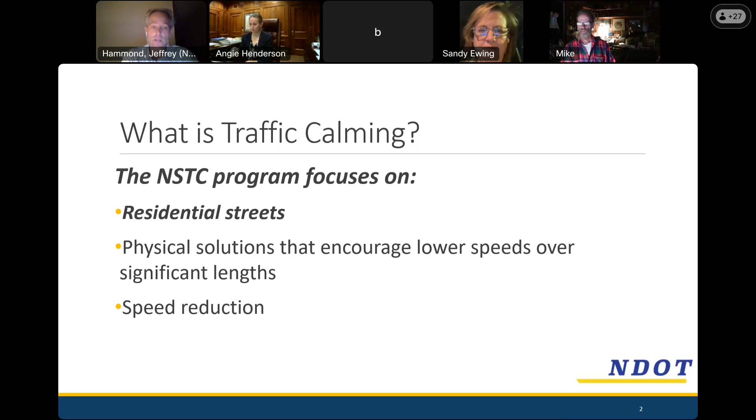We do focus on residential streets. That's as opposed to some of the larger streets that are meant to carry more traffic and sometimes at a slightly higher speed. We really focus on lowering speeds, and that sounds obvious, but sometimes people think we are trying to move traffic, shift it away from one street to somewhere else, and that's really not what our design is intended to do. We look very carefully at the types of countermeasures that we deploy on a street, just to make sure that we're focusing on speed reduction and nothing else related to car travel on the street.

This is one part of a bigger effort in Nashville and really across the nation, dealing with some of the safety issues that our country has seen involving speed. Engineering is part of it. That is what the Department of Transportation has in its purview. It can affect a change in the right of way. It cannot enforce traffic. That's the job of Metro PD.

And a lot of us wish we would have more police out in the cruiser writing tickets, and that might bring about slower speeds, and it might. We typically think of those impacts being relatively short-lived, but it's certainly a component of a well-functioning safety system, and we work hand in hand with MNPD on this program and others to try and bring about better outcomes.

Education is a big part of this as well. Some of the things that we can introduce in the right-of-way as part of a traffic calming program do get to reinforcing a message, an education message in terms of what the speed is or how fast you are going. But by and large, we really focus on that engineering component, putting things in the road that will physically limit speeds. And we like to show this slide.

It's one of the main reasons why we feel like this is a really important program. And I think a lot of residents in Davidson County agree with this sentiment, that you'll see that in the numbers here about how in demand the program is. But we know when we've got a street where we've got cars and bicyclists and pedestrians and everybody trying to share the same limited space, that if we can slow the cars down, and there is an unfortunate instance where there's a pedestrian car collision, there's nothing like speed to boost the survivability of that outcome.

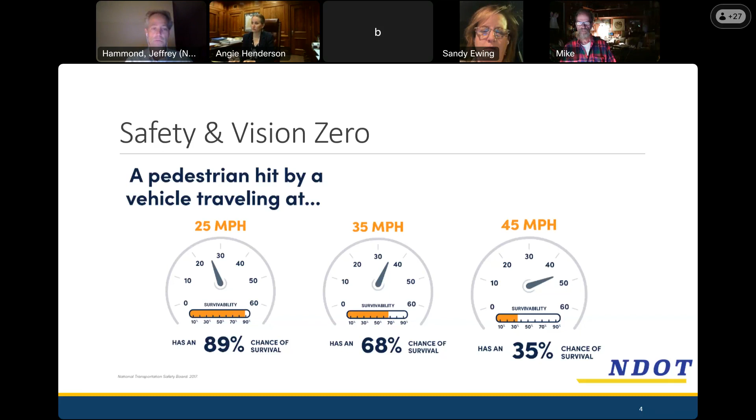In other words, if we can bring traffic down to that 25 mile an hour or less threshold, you've got a much higher probability of not walking away from the crash, just surviving it. And so we really focus on that. And Page is one of these streets where you've got a lot of pedestrians who want to walk on the street. We're aware of that. Some probably make the decision not to because they don't feel safe doing that. And so all of these things kind of come into our thoughts when we're designing a traffic calming project.

I mentioned the in-demand nature of the program, it has remained exceedingly popular ever since we really started putting in speed cushions back about 5 years ago or so. As of this last traffic calming application window, we have 2 of those a year, and we're still well above 400 streets, just like Page Road, where people have requested that we come in and do a project because a lot of Nashvilleans are seeing these same issues involving high speeds and sometimes worse behavior.

Just different things happening out there on our residential streets, which are not desirable. We do pick about 50 projects a year right now, although this last fall there was an announcement that Nashville is doing its largest traffic calming cohort ever. We selected 85 new streets at one fell swoop, thanks to council and their interest and support of this program and finding the funds to do that, and we're working diligently on that. I'm glad this project is ahead of those, a little bit ahead of that tidal wave of new projects coming in, so hopefully that'll make this one move along pretty smoothly.

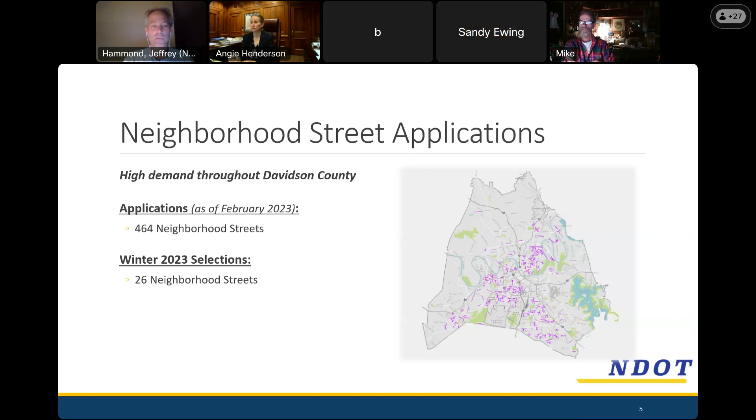About 70% of the score has to do with actual driving and traffic characteristics, speed and volume. What drives that score - speed is the biggest single consideration that we have. But the other 30% are very important too, and those often differentiate which projects get to move ahead and which have to wait, and that has to do with the presence of things like sidewalks or transit routes.

You guys don't have sidewalks, and so that actually bumps your score up, we do take that into consideration. The presence of places that might be a walking destination - of course, you got a big one there with the park, and so that factors into the score as well. Parks and schools and those types of things. And then we do look at the instance of any kind of a pedestrian injury or fatality crash that might have happened on the road as well.

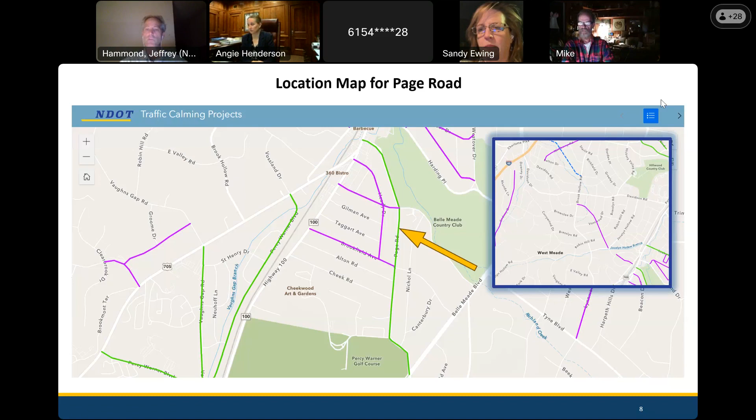So a little bit about the tools available in our program. We'll start with speed cushions. This is really the bread and butter of this program, and a lot of people just associate traffic calming with speed cushions—that's okay, it's probably 95% of what we do, so it's very understandable. When I show you the proposed plan for Page, like almost all our projects, speed cushions will be a central component of it.

If we leave 4 or 5 feet or more, we know what's going to happen. People are going to drive around them, and we've had experience where people will actually leave the road to drive around them if we let them, if we give them room to do that. I think that's a pretty tall order on Page. I think you've got some pretty unique side conditions where people are not going to do that because of the edge condition with ditches and trees and so forth. But we know that's one aspect.

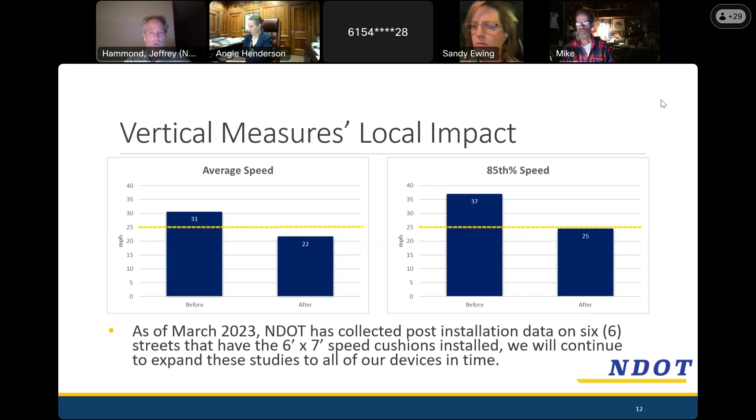Another tool that we've got in our toolbox, probably the second most frequently used, is radar feedback signs. You may have seen some of these around. They're solar powered signs, and they just do what they say they do.

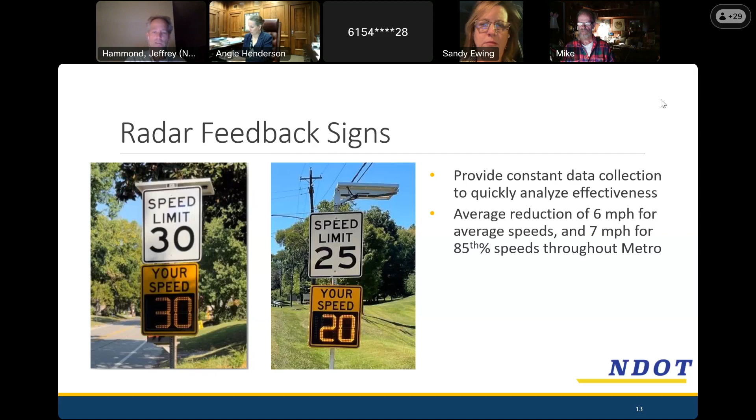They give you feedback about how fast you're going. A lot of times we'll use these in places where we really can't use a speed cushion, like a sharp curve or steep hill, or where there are so many driveways and intersections we can't fit a speed cushion without inconveniencing someone. It can be a good tool, and it is effective, especially in the short term. We're still in data collection mode to see how that effectiveness holds the longer the sign is out there.

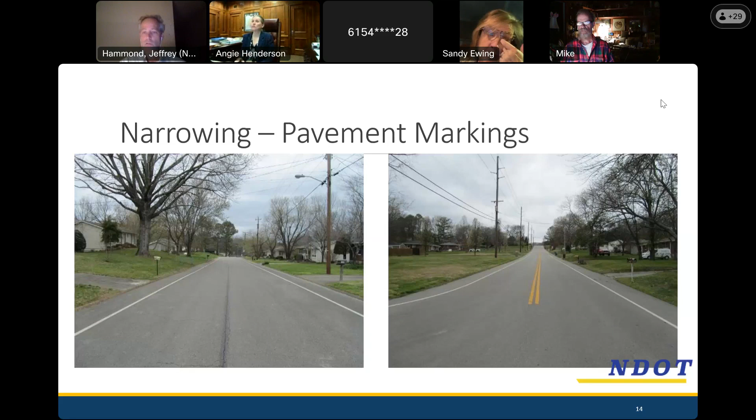So just another tool that we have, and again, this gets back to the educational component of traffic safety. Occasionally, we'll use narrowing if a street does not have any pavement markings. Sometimes adding a stripe can visually narrow the street and give the perception that it's narrower than it actually is. We have to be careful doing that. In this picture, we added a center line, but under different conditions that may communicate it's more of a major street and that it's okay to go faster. So we really look at those case by case to make a recommendation about whether that's a good treatment for slowing traffic down.

One tool we keep in the toolbox, but we've had a lot of thoughts concerning larger vehicles and how they navigate these, is whether the inconvenience they create is worth the trouble of putting them in. The jury's still out on some of those, but we have deployed them in some neighborhoods. Traffic circles - school buses particularly have a tough time navigating these, so it's something we keep in the tool, but use pretty sparingly.

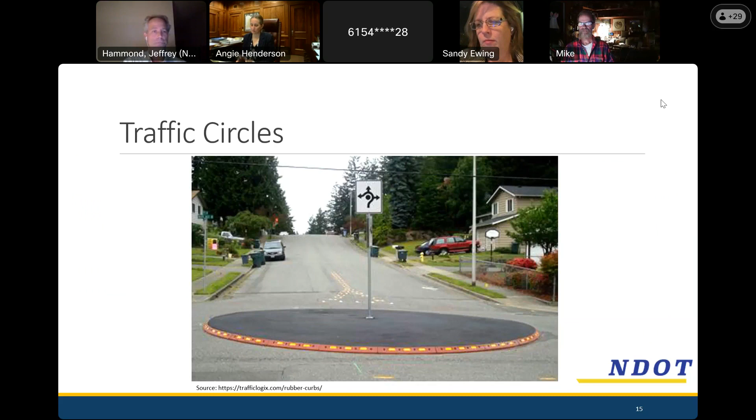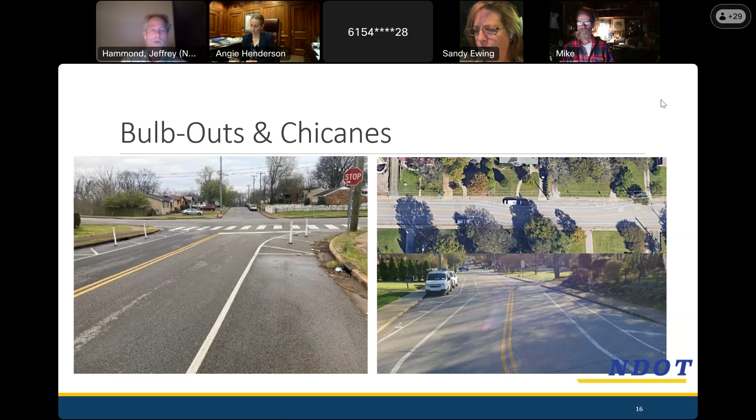Sometimes people will say what we really need, and I know this is the case on Page Road, is sidewalks - somewhere safe to walk that's outside of the road. There have been meetings discussing the issues, details, and cost of doing that on a street like this, and there are other avenues to request those types of treatments.

Hub Nashville is always the best go-to. If you're not familiar with it, it's hub.nashville.gov, or you can just pick up the phone and call 311. We like to promote that because really any service you want to request in Metro, that's your best first stop. It's logged, so you've got a record of having made that request, and they get it to the right people. We've also got a couple people here who do great work in walking and biking infrastructure, and beautification and vegetation.

So on to, I guess, the middle objective of the evening. We want to show you what we're thinking about Page Road and get some feedback.

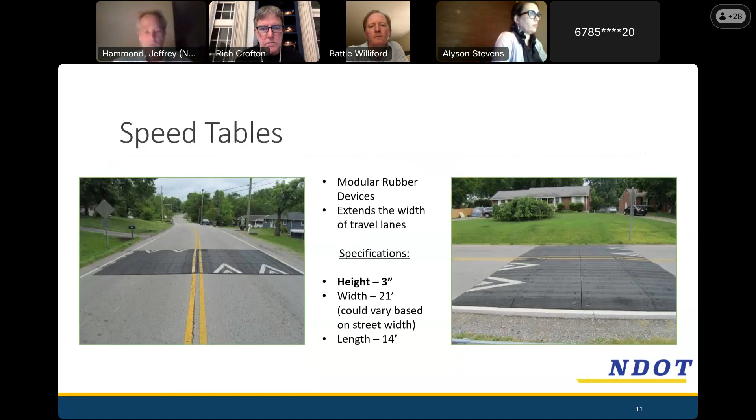That's really the point about the signs - it's not to bring any more speed traffic calming aspect to it. So for that reason, we really can't just pull them out and say we think they're kind of ostentatious, so we're going to not use them here. They are really part and parcel of the project. But I will say, the policy NDOT uses on these is anytime we have a run of speed cushions in between two streets - so for instance, in between Forest Park Drive and Cheek Road, we have 2 cushions proposed.

Let me use this as an example. Between West Tyne and Harding, we have 3 cushions proposed. We may not have to sign that middle one, because we can sign the first one that says speed cushions ahead, and the other one coming from the other direction, speed cushions ahead, and not necessarily have to sign all 3. But where we have an intersection in between and new traffic is entering this road that would not have seen those signs, our policy is we do sign at each of those locations.

There's one other benefit it can have. Let me go back to my picture. It's going to depend on what set of speed cushions we're looking at on the page. But as I mentioned, we know there's some severe drop-offs, big trees, and probably landscaping walls and other things that a car does not want to hit in order to drive around these things. That can also be kind of a hardening of the edge, so that if that sign weren't there, somebody might have the gall to drive around this thing, leave the road, and try to drive around it and come back.

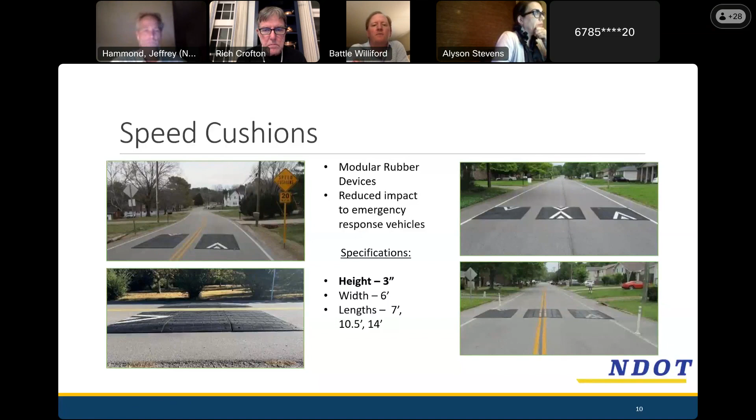Anything else there? Sure. I have one last question, sorry. Sure, have you found—I know you have some of those sticks, delineators, whatever you call them, in a couple of these photos.

I noticed you didn't use any examples where those were placed down the center of the road. I know there's a couple places in town where those are placed down the double line or down the center of the road, also as a traffic calming mechanism. I know Page is obviously very narrow, so that might not be an option here, but I was curious if you found the speed cushions to be a superior method of traffic calming, and that's why the other was not proposed. Yeah, they're very superior.

We would not recommend using delineators by themselves for mainline traffic calming. They can be very helpful, as we showed, at corners and things like that, to try to shorten up some of the turns. If we were designing a road today, we might have a tighter turning radius, more like you see in downtown, where you can't drive around these corners very quickly. But these weren't built like that. They were built at a different time, so we have to come back and use devices like those delineators to recreate that.

Yeah, you're right, if we put delineators in the middle of this road, they're not going to last very long. They will get hit, practically everywhere. It becomes a catch-up to keep those maintained and replaced, and with 550 square miles of metro government to tend to, that's a big maintenance issue.

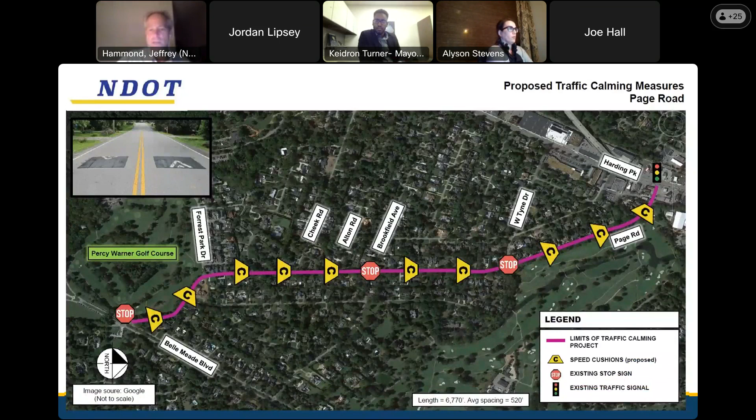I'm going to flip back, there are a couple more details about that. This is too small of a scale, but if we have any horizontal properties where there's two dwelling units on one parcel, both of those get a vote. I don't think we have any condominium complexes or anything like that, we get into some involved cases, but for the most part, if we send that to the property owner of properties abutting the right of way of the street, that's the simple answer. After the online ballot, that's a six-week process.

After that closes, we look at the results, and if 66% of the people who voted are in favor of the project, we will then move it to the last step, which is ordering the materials and getting it on the list for our contractors to install. So that's where we go from here. Any other questions about that? The ballot is a typical question that comes up, but there may be other aspects you want to hear about, so feel free to ask.

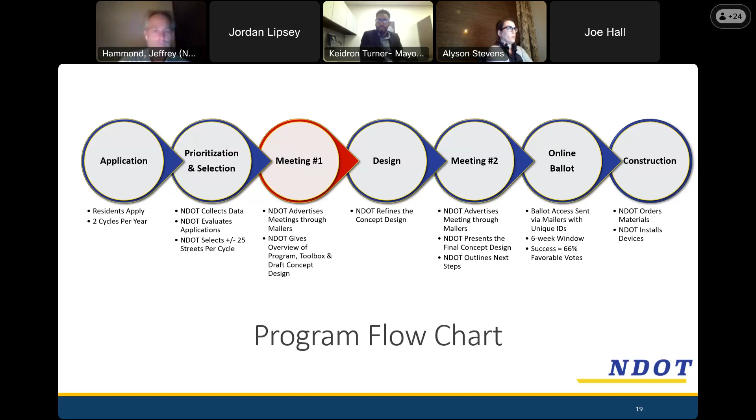I want to respect your time, but I certainly don't want to rush the meeting. If there's anybody who has any final questions or comments, be glad to entertain those at this time.

And if not, we will thank you again for your attendance and your interest in this project, especially the participation from our council members and vice mayor. Always glad to have you all. Appreciate what you do for our city. With that, I'm going to conclude the Page Road component of this project.

But as I mentioned at the outset, we do have a little bit of information from NDOT on the Forest Park Drive project. So, Mr. Oldham, if you're here, I will end my sharing and turn it over to you. Can you pull up the presentation for Forest?

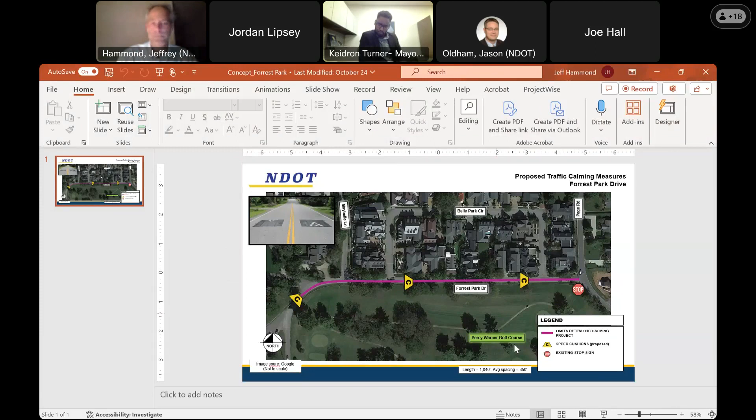Can you see that? Yeah, I can see it. It just came in. Great. So I think everybody can look at this and orient themselves pretty quickly.

This is Forrest Park Drive, and again, like probably a majority of the streets in this community, but especially next to park property, there's a lot of foot traffic. There's probably two agencies ordering a lot of cushions right now, and it's Nashville DOT and the Parks Department. So there's been interest in getting cushions on Forrest Park, and also interest from the community and others on the call.

So some of these projects, we do have opportunities occasionally. I've actually got a plan set on my desk right now from Parks to review some cushion placements on a roadway that we maintain, but it serves the park, and they're going to pay for everything. We're just reviewing to make sure everything is good before they pay for installation of these cushions. So these are the same cushions that were already talked about on Page Road. We would be placing them in 3 locations on Forrest Park Drive, just to make it safer for pedestrians and bicyclists accessing the park.

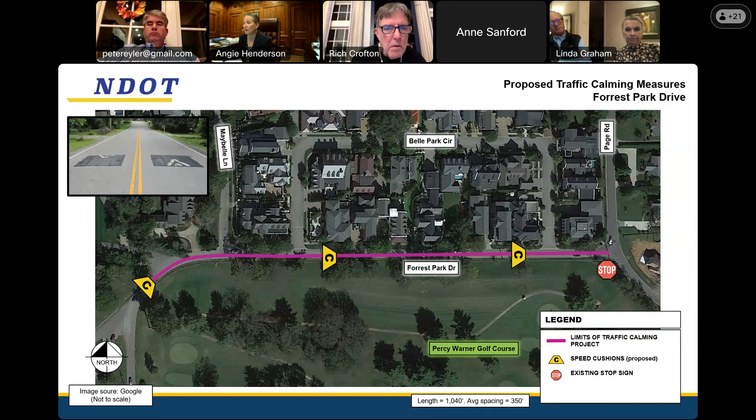That study is funded. It was in the capital spending plan. We can look at all those things. I definitely want to—I've spoken with Council Member Ewing about having a neighborhood-focused meeting regarding that study.

The reason that seemed to be going so fast was because we were trying to front-load the capital piece of it—what might be recommended for the border of the park and the golf course, because we knew the golf course was getting finished. So I was asking planning to hurry up on that front piece about where the greenway is going to be, where the crosswalk is going to be.

What are you going to do about the stormwater, and where are you going to plant the trees. That's the only part I really asked to be moving fast. But the larger, bigger questions about ingress, egress, parking—all those existential fraught issues—we've got to keep talking about them. But from my perspective, we needed to press pause on that part of it. So.

Angie, this is Lyle Beasley. Just one thought that's not about the speed cushions.

I'm okay with the 3 cushions, or I don't know about 3 versus 4, but the top one that Rich was talking about, very near there, a new picket fence has gone up on the golf course that's so close to the road that it's pinching the pedestrians and bikers right there above that top pinch point. So when you say greenways, do you have a feeling for how a greenway with bicycle access would come up this road? Yeah, I was very disappointed to see that fence, Lyle. I wasn't aware it was going to be put in.